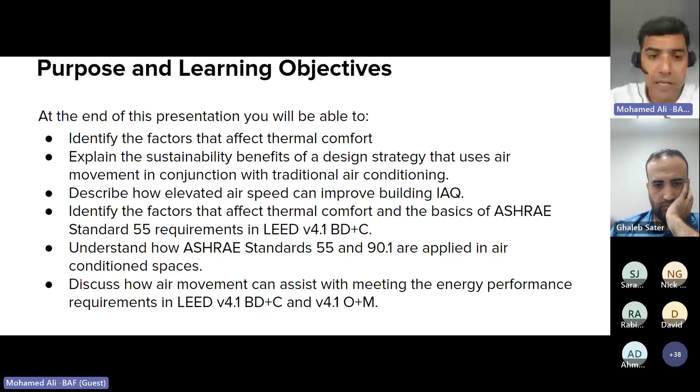First, we need to know what thermal comfort is. According to ASHRAE 55, we have a definition for thermal comfort: the condition of mind which expresses satisfaction with the thermal environment and is assessed by subjective evaluation. Simply, thermal comfort is totally a perspective for each one of us.

Typically, if we are a group of 10 people in one meeting room, and let's assume, for instance, we are between 22 to 25 degrees Celsius and RH about 50–55%, we would see the majority of us feel comfortable, but some of us will definitely not. Some of them would be complaining, oh, it's a little bit chilly. Some others would complain, oh, I feel a little bit hot.

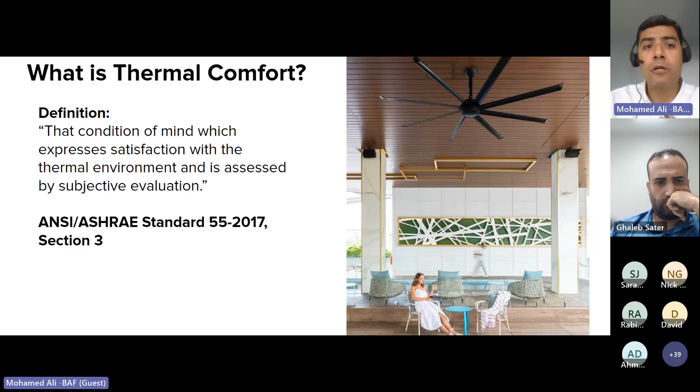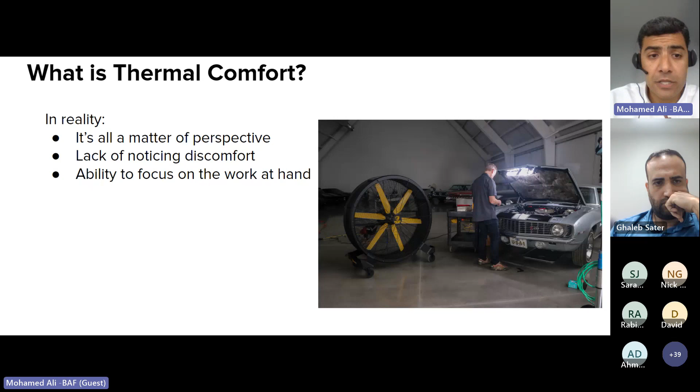So thermal comfort would be perspective from one person to another. That means probably the majority will be fine, but everyone has his own terms to identify thermal comfort. So in reality, thermal comfort is perspective, lack of noticing discomfort, and ability to focus on the work at hand.

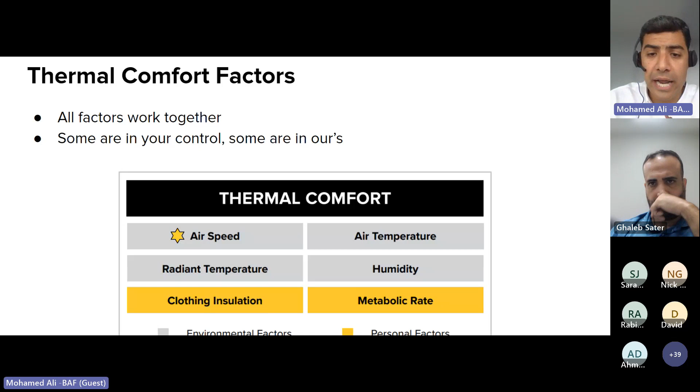Thermal comfort factors. There are some factors that affect our thermal comfort every day. There are actually 6 factors, 2 personal and 4 environmental. The 2 personal are clothing insulation and metabolic rate. We definitely control how many layers we're wearing a day, and we control the action, which is generating the metabolic rate. And the four environmental ones are airspeed, air temperature, radiant temperature, and relative humidity.

Clothing insulation. Each layer we add on our body has a clo factor. The more layers you add on your body, the more clo value. That means you feel much warmer. Technically, every one of us during the wintertime would be wearing multiple layers to keep warm.

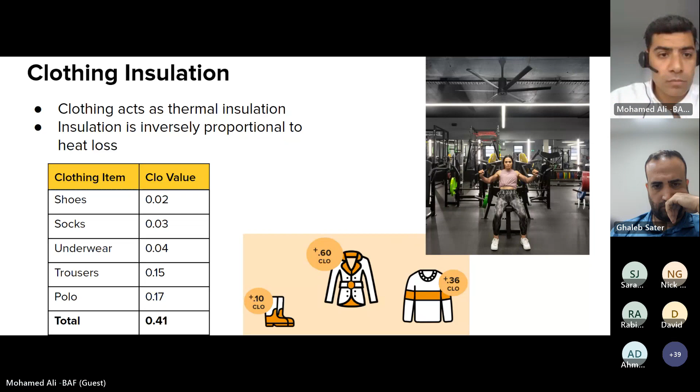Metabolic rate. In each picture that we see, we find someone who is standing, playing guitar, versus someone who's biking, versus another one jogging. Each one of us has a metabolic rate based on the action. So the more action you do, the more metabolic rate you get, and the warmer you feel.

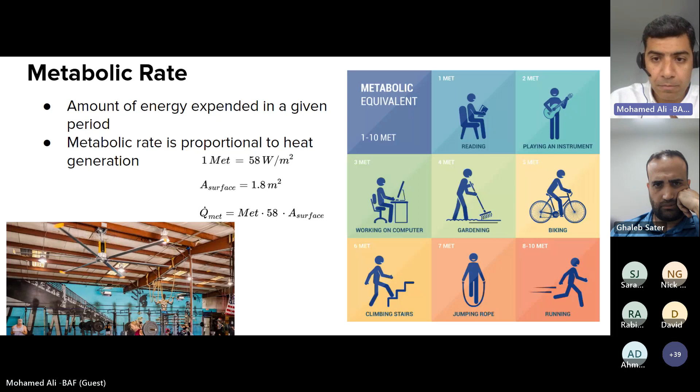Air velocity. Air velocity influences heat flow to and from the body. Typically, during the summertime when you come to the office or home, if there is no AC, the first thing you will do is turn on the fan at maximum speed. Why? Because you feel hot, probably sweating. So the air flowing to your body evaporates the moisture, and then you feel much cooler. So it impacts the rate of moisture evaporation from your skin.

And we have another example that we have day to day, while we're driving the car at a high speed, probably 110 kilometers per hour, during the summertime. The weather is probably 30 degrees.

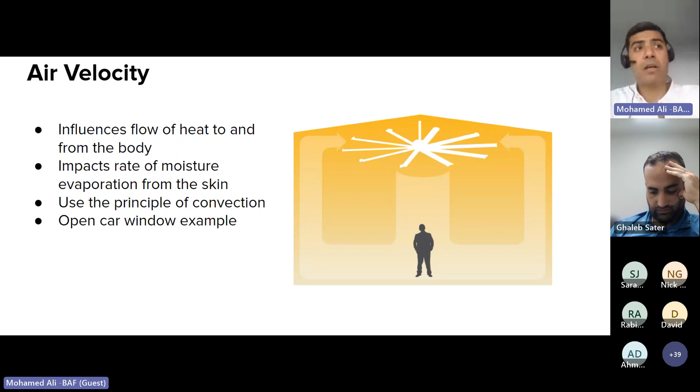You feel hot, and you just open the window, blowing all the air in, crossing your hand, your body, evaporating the moisture, and you feel much cooler. Technically, the temperature has not changed, but you get the perceived cooling from the air speed coming through the window across your body.

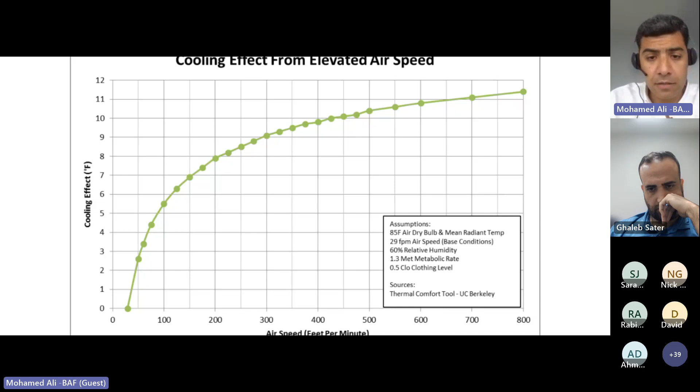And if we increase up to 700, you will see we can get up to 11. So if you increase over 800, you would be able to get more cooling effect. So the more airspeed, the more cooling effect you can get.

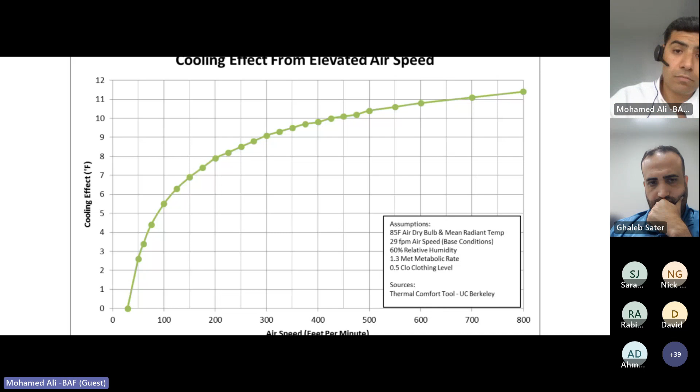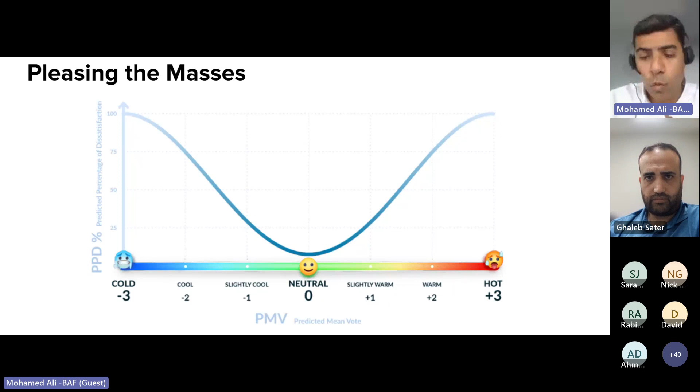Moving to the right side on the horizontal axis, you will be slightly warm, then warm, extremely hot. Moving to the left side on the horizontal axis, you will be slightly cool, and then cold. So we aim to be around neutral.

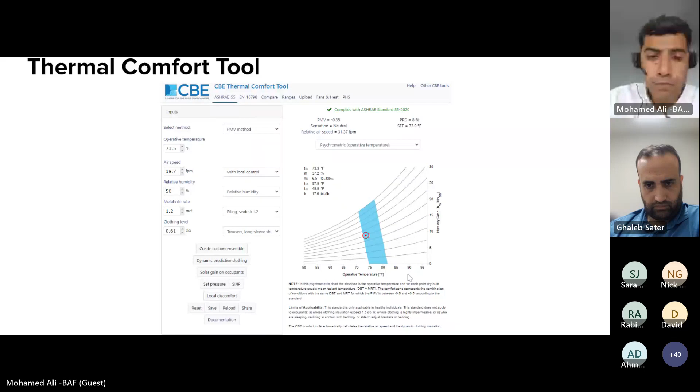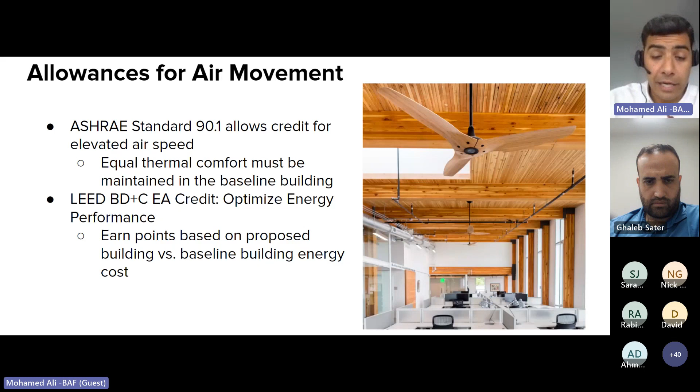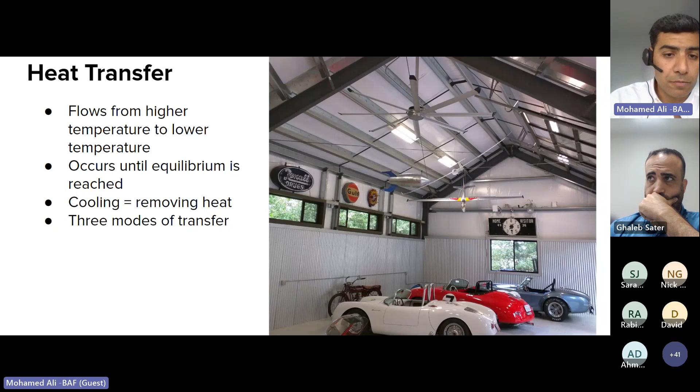So that occurs until equilibrium is reached, releasing the heat until the liquid temperature is equal to the surrounding temperature. And there are 3 different modes of heat transfer: convection, conduction, and radiation. I know probably 99% of the audience are aware of that, but it's a quick heads up on the basics. Radiation comes from the heat, conduction from the hand, and convection from the boiling water to the surroundings.

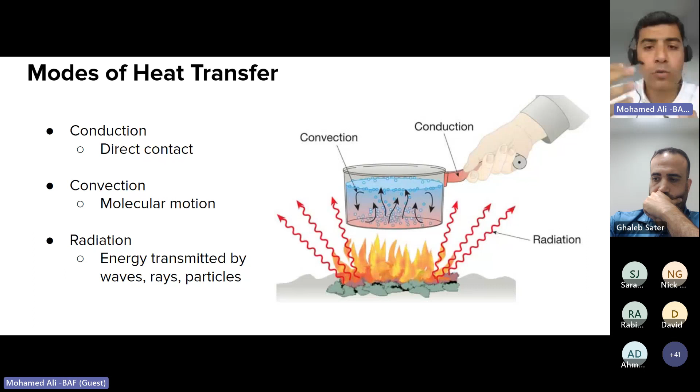We always say the human is a bad thermometer, because sometimes we really misjudge the situation or the surroundings. So, for example, if all of us are in one room, and the room is 22 to 25 degrees, RH about 50%, most of us will be comfortable. But let's assume there's one person coming out of a sauna.

It's about 70 to 80 degrees Celsius, and he's stepping into a room which is between 22 to 25. He will definitely feel a little bit cool, probably even cold. So even if it's comfortable for the majority of us, still someone is complaining and actually misjudging the situation or the temperature.

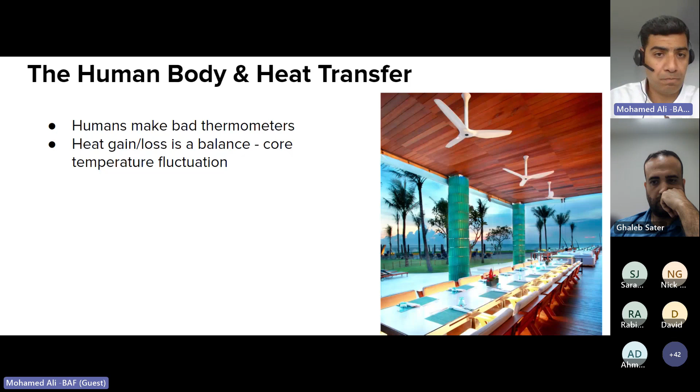There are 3 different modes of fan control that we typically use during the year. The first is increasing the airspeed to promote perceived cooling. Typically, this is in the summertime. Every one of us feels hot. You're running the fan at the maximum speed because you want to cool down.

In the wintertime, you receive a lot of complaints that the heat is not reaching down to the ground level. So we run the fan at low speed to promote destratification. And overall, we can run the fan at medium speed to have good mixing in the surrounding area.

Elevating the airspeed increases the convective cooling potential and evaporation rates. And we have Q convection equal to h, multiplied by the area, multiplied by the temperature difference.

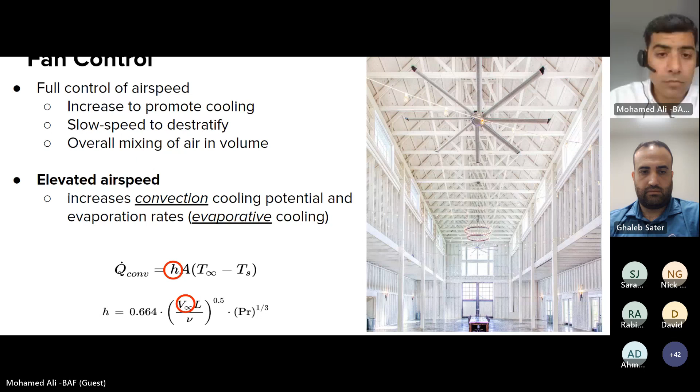Designing for cooling. The picture on the right-hand side of the slide shows one of the projects we have helped with, to promote cooling within a warehouse in certain areas like shipping and receiving and the workshop area where the employees are. Typically this is the area most warehouses are looking to cool: the workshop for the employees, and the shipping and receiving area for the people who work there.

So we have SpecLab, the app we usually use when we make our recommendation to do the design for a warehouse, hangar, office, whatever the application is, to provide the CFD, computational fluid dynamics, and it also gives the area metric, how much cooling effect you would be able to get by running the fan at 80% or 100% of the speed.

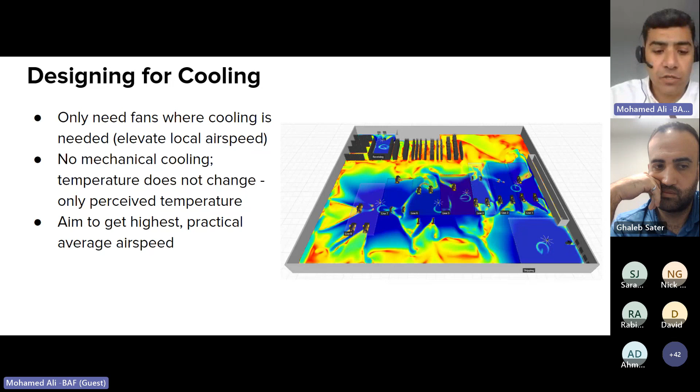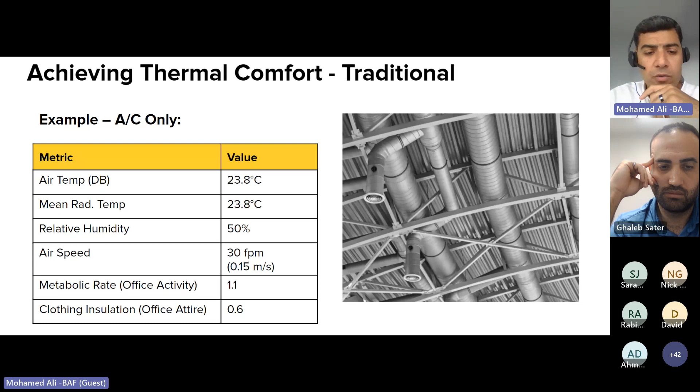Very interesting case. Now we will see thermal comfort with the traditional HVAC system, which all of us are aware of. So we've got a space with an air temperature design point of 23.8 degrees Celsius, RH 50%, air speed 0.15 meters per second. We are going to plug all the parameters we have here into the psychrometric chart, and we will see where we are.

Now I'm going to add the ceiling fan to the traditional HVAC system. I'm going to go to the thermostat and push it up from 23.8 to 26.1. And I'm going to run the fan to promote 0.6 meters per second, where in the previous case with the traditional HVAC system only it was 0.15 meters per second. So I'm changing the airspeed from 0.15, running the fan to promote 0.6 meters per second.

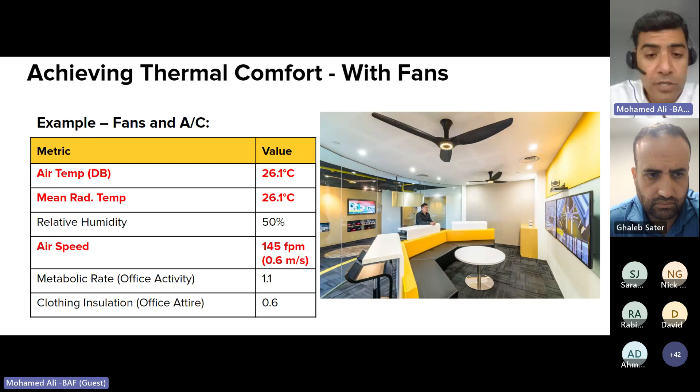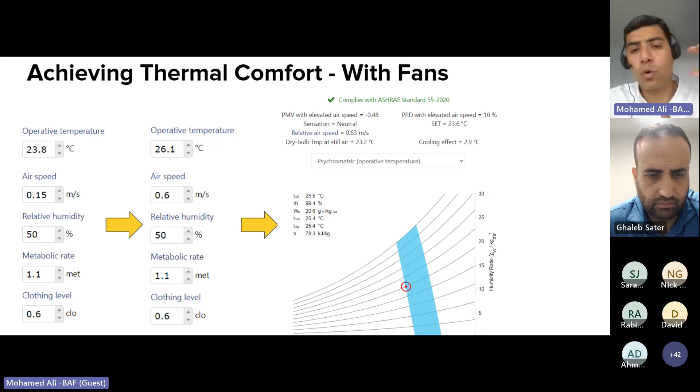And we're going to plug in the new data, 26.1 and 0.6 meters per second, and the remaining parameters will remain the same. So the point has not changed. That means I am in the thermal comfort area on the psychrometric chart. So I raised the thermostat and am still getting the same cooling effect and the same thermal comfort.

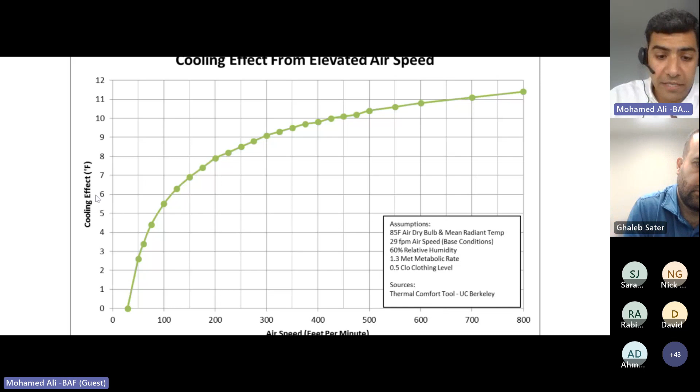Were they able to increase the cooling in the space using the ceiling fan? Yes. And that will take us quickly back to the chart here. By increasing the airspeed, you are able to get a cooling effect. So you will see the point here.

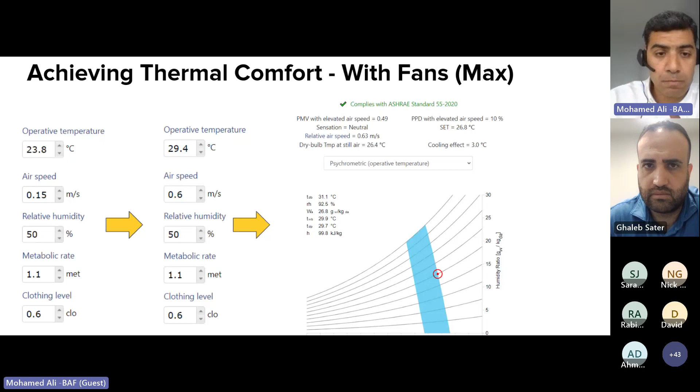This is one of the school gyms that we actually have done in Lexington, Kentucky. So we will see here, the location is about 7,833 square feet, and the set point is 22 degrees Celsius. We'll see the material and installation cost is $7.39 per square foot.

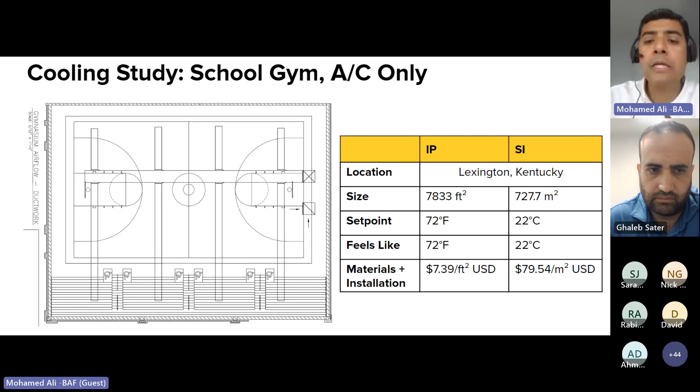If we apply the same concept to move up the thermostat from 22 to 25, that would be able to save the material and installation cost from $7.39 to $6.79. And this definitely has an impact on the duct material, insulation, and the labor.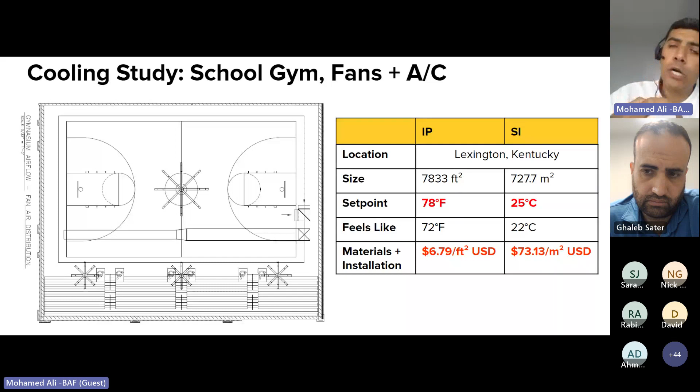And typically, if we see here, it's a main duct in the middle, multiple branches with the exhaust to cover the entire area. Here, it's only one main duct coupled with a ceiling fan able to distribute and get the perceived cooling effect or air mixing in the space. So the material and installation cost, including the fan, would be 60 cents per square foot.

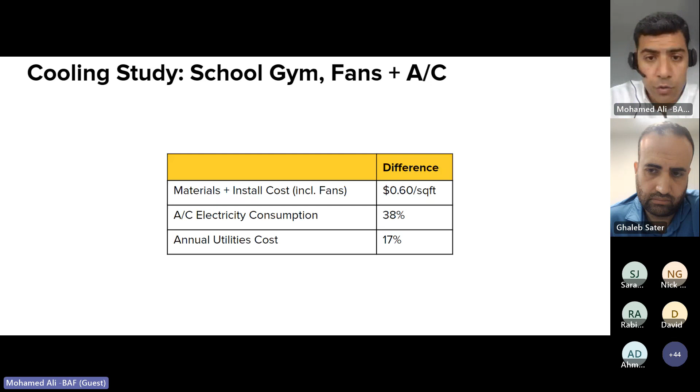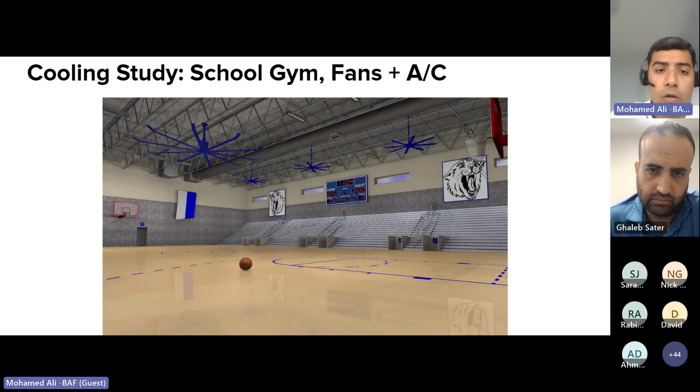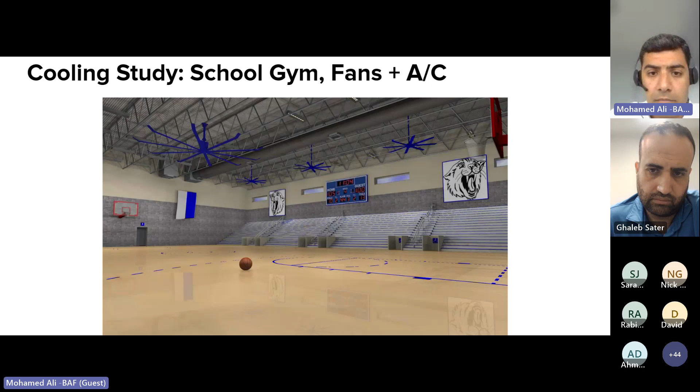We got a very common question. Would the fan be affected if the balls in the gym area hit the fan? The answer is no. Our fan has a number of safety redundancies and is very durable. It has a very durable design so that if the ball hits, there is no damage that would ever happen to the fan. And quickly, I'm gonna run the video for a couple seconds.

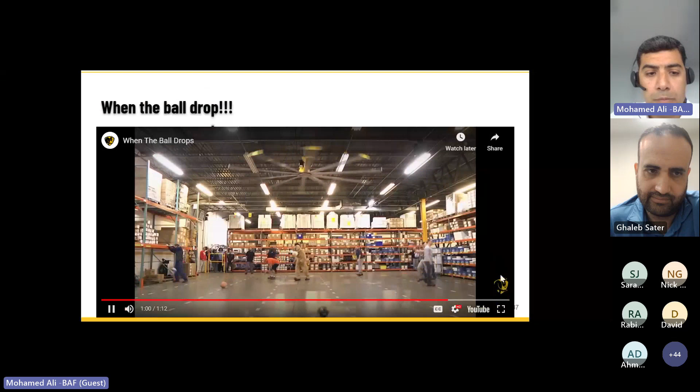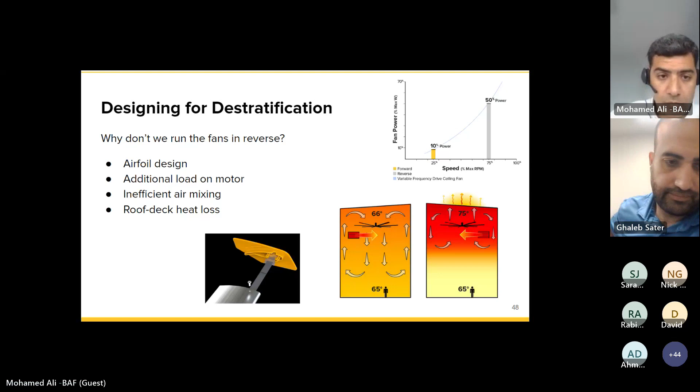Another example is for offices. The question is, if we have a warehouse or a gym area able to get a perceived cooling, do you think it would be applicable in an office? Yes, it'd be applicable, and we have done that. In a few slides we'll see one example in offices. We apply the same concept.

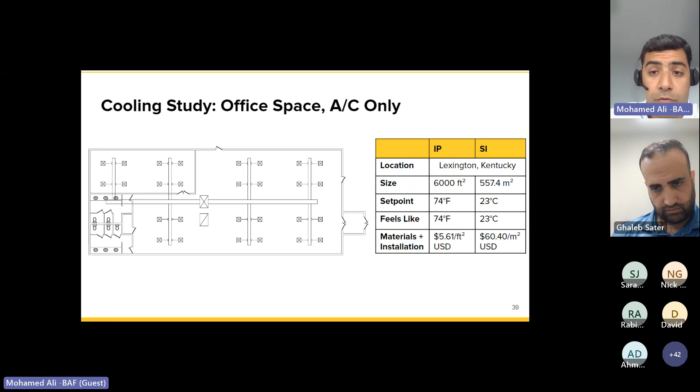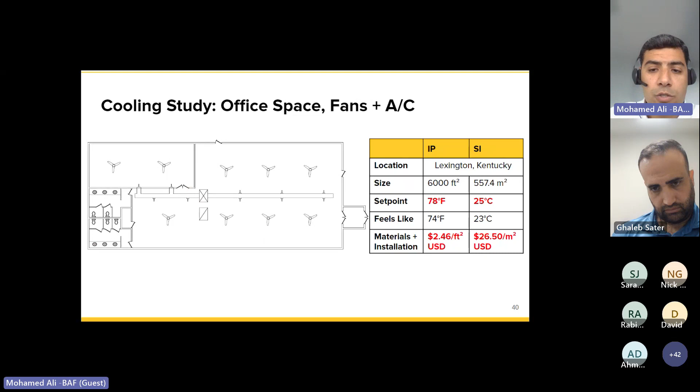And here is an example we're going to quickly go through. Our design point is 23 degrees Celsius, and we'll see the material and installation cost, including the duct, insulation, and the drop ceiling, will cost us $5.61 per square foot. Now, we're going to raise the thermostat from 23 to 25. You're going to get the same cooling effect, but your material and installation cost goes down from $5.61 to $2.46 per square foot. The fact is you saved the drop ceiling cost, you saved the duct, labor, and insulation.

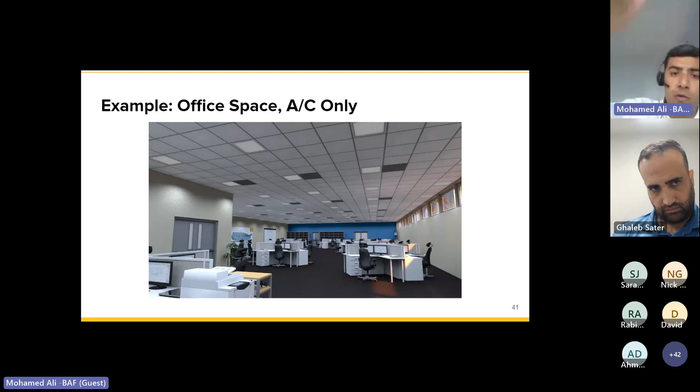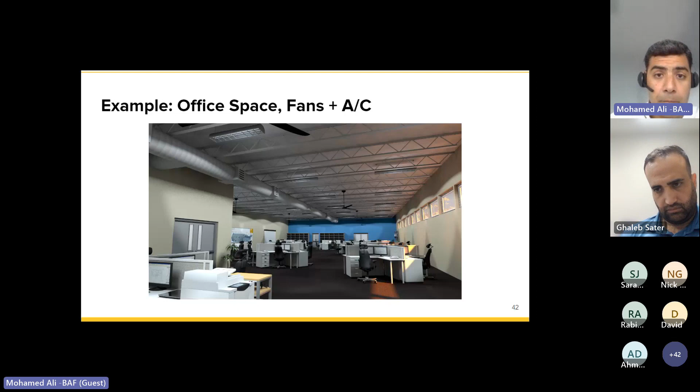So our summary here: offset the thermostat by the cooling effect generated by the fan. In all cases, we set the thermostat up 2 or 3 degrees and still get the same cooling effect. When we plug all the numbers into the psychrometric chart, it shows we are in the thermal comfort area according to ASHRAE 55.

Running the cooling equipment less, absolutely yes, and that reduces energy and saves money. Depending on how big the area, the warehouse or space is, if we save 2 or 3 degrees daily running the HVAC equipment during summertime, we can understand how much saving we would get by the end of the season.

It reduces the CAPEX of new builds through smaller cooling equipment. You can consider the ceiling fan's cooling effect during operation, and when you do, you're able to save on the capital cost of the cooling equipment when designing the HVAC system. It also reduces the OPEX, the operating cost over the year.

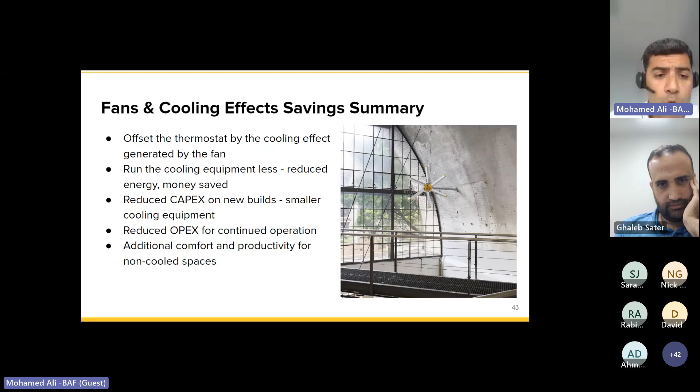So typically, by raising the thermostat, you achieve savings during the summer season, plus additional comfort and productivity for all non-cooled spaces.

Now we are going to talk about stratification and what we call destratification. This is basically the main complaint in most warehouses, hangars, and manufacturing facilities, especially with high ceilings above 15 feet - they always complain that up near the ceiling it's too hot.

If they have a mezzanine going up, they always complain it's too hot up near the ceiling, while at the ground level, where the employees and thermostat are, it's always cold, especially if gates are opening and closing during the wintertime.

So here's the second option: using the ceiling fan during wintertime. For stratification, we target ceiling heights above 15 feet, where it's definitely difficult to get uniform temperature.

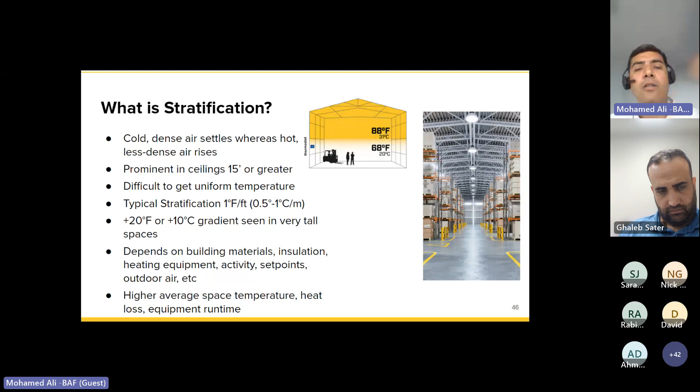Our point is we want to achieve destratification and better mixing by running the fan at low speed, letting the thermostat identify the right temperature at the ground level, so it can signal the heater to stop. Otherwise, the heater keeps running all the time because the thermostat at ground level reads only the cold temperature, not the right temperature.

So when designing for destratification, fans are needed throughout the area served by the heat to achieve maximum savings. As you can see in the picture on the right, the air is circulated in the space, and what we're looking for is to mix the air in the space - ideally, that's the goal.

There are guidelines and clearances that must be maintained to ensure circulation in the space: typically 2 feet away from the airfoils, the same distance as the fan diameter below the fan, and a clearance between the roof deck and the airfoils. We also need to maintain 3 feet vertically from the airfoils up to the sprinkler system, according to NFPA.

However, we need the fans positioned within the area that has the most heated air, then run the fan at low speed to push the warm air down and circulate it through the space. Fans can be spaced about 200 feet apart from each other.

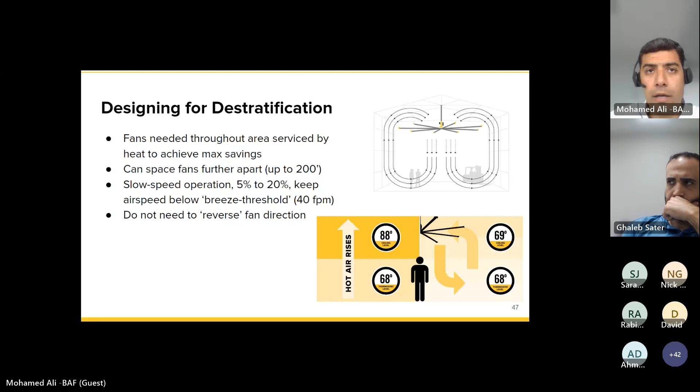We do not need to reverse the fan in wintertime for destratification. I guess it's a misconception for most of us that the fan needs to run in reverse during the winter.

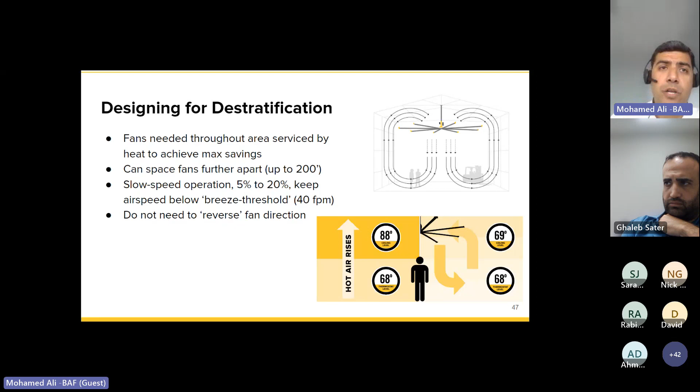We will see in the next slide, this is not recommended as a ceiling fan manufacturer, and that's due to a few reasons. The first is the airfoil design has an angle. As we see here, the fan has an airfoil shape. So if you're running the fan reversibly, that's going against the fan's airfoil design, so you wouldn't get the performance out of the fan, and there's additional load to the motor because you run the fan against the airfoil design.

Inefficient air mixing. Typically at ground level, the people are there while all the warm air is up. So if you're pushing all the air up, that means you don't mix the air in the entire space. You just mix the air up high near the ceiling, meaning less mixing down at the ground level, and the warm air will be up, and on top of that you're losing heat by pushing it all to the roof deck. While in the picture on the left side, the air is circulated, and you're able to get the benefit out of the ceiling fan by circulating the air in the space.

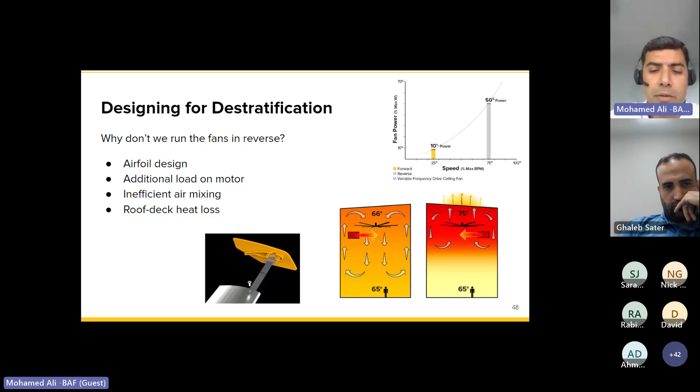One example that was done for Kentucky National Guard - they had a problem with stratification. They had a 36 foot ceiling height, and they were able to solve the problem by using a 24 foot diameter fan, the Powerfoil X4.

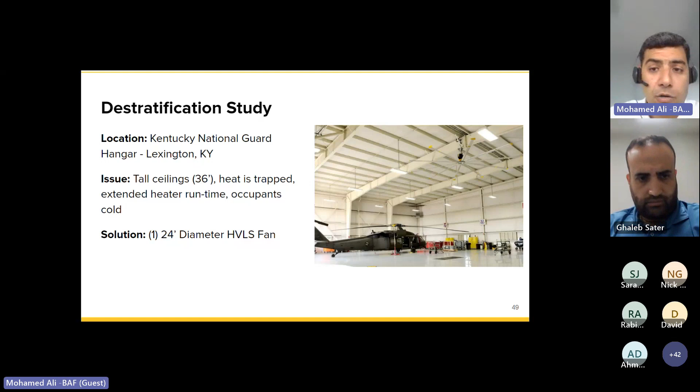If we run the fan, we see it start working and mixing the air in the space. We see the gap between the temperatures at different ceiling heights has shrunk, and we mostly saw a temperature difference of probably 1 degree or less between the 3 different height levels during the day.

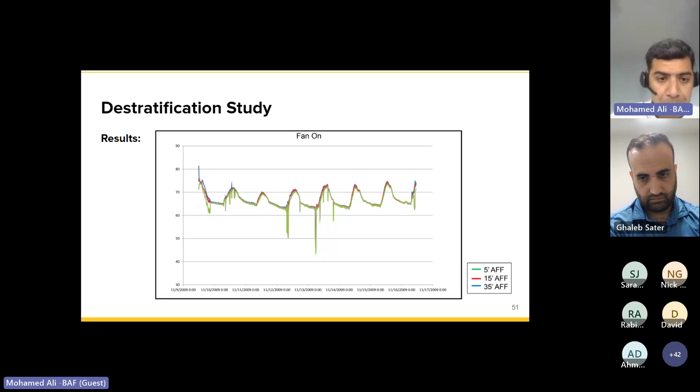This would also affect gas consumption. Mostly if the fan is off, we see the average temperature in the space would be 35.6 degrees Fahrenheit, while the average occupant level would be 56 degrees Fahrenheit, and the gas consumption would be 60,000 cubic feet.

While if the fan is on, that mixes the air in the space, the average temperature goes up from 35.6 to 35.8 - we see 0.2 degrees average temperature increase when we mix the air using the fan. The average occupant level goes to 56.7, with a 0.6 degree temperature difference, and the gas consumption goes down to almost 49,000 cubic feet. That shows us the difference is about 10,000, or 10,983 cubic feet.

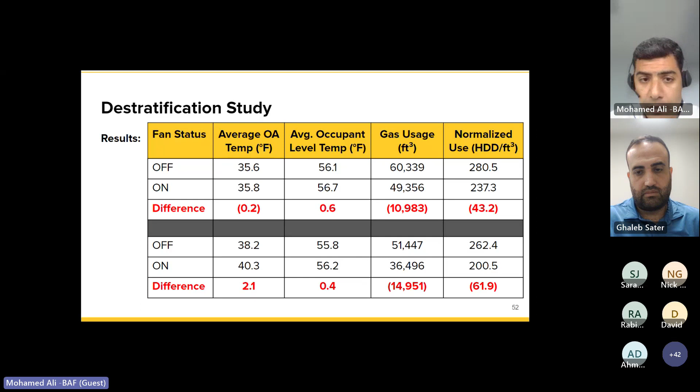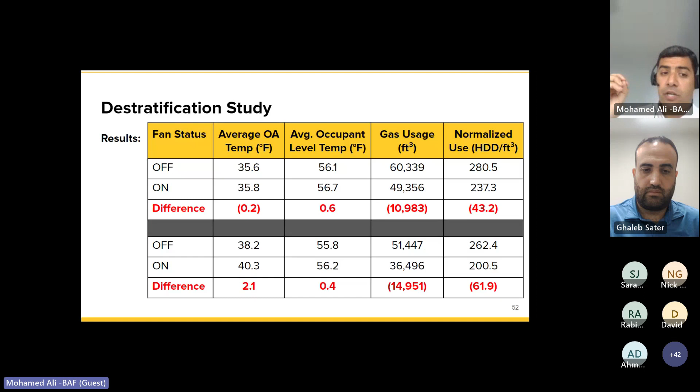If we have more than 0.2 - if we move the difference temperature up from 0.2 to 2.1 average temperature in the space, while at occupant level it's 0.4 - we see the gas consumption difference goes to 14,951. So that means the difference temperature at 0.2 has an impact of about 11,000 cubic feet of gas usage. In the case of a 2.1 degree Fahrenheit difference, we see about 15,000 cubic feet.

So the result of the study is the annualized gas saving would be 272,247 cubic feet. The cost saving would go to 2,714, while the fan operation cost will be $37. So simply if we do the math, we're able to get a net saving of about 2,677. And we've done the calculation for heat saving - how much heat and money you would be able to save by the end of the year by using the ceiling fan.

So this is something we would be able to provide if you are interested to see how much saving there would be if you would like to combine the ceiling fan for destratification with the heaters during the winter time.

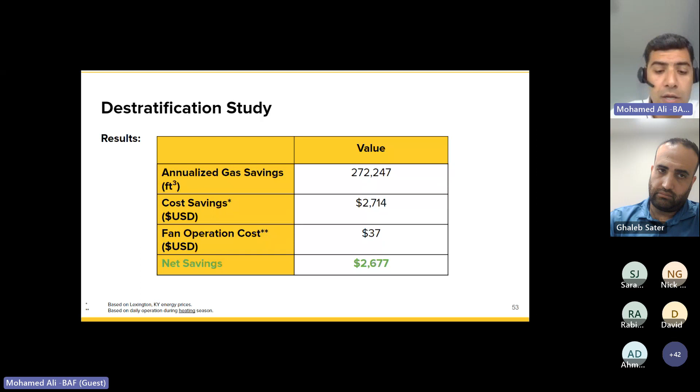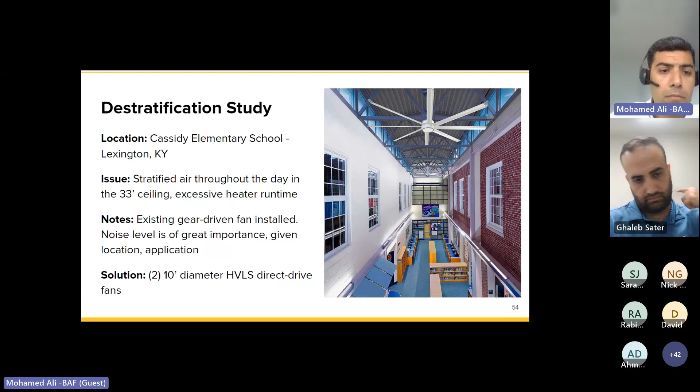We have the destratification study here for one of our projects at Cassidy Elementary School. They had an issue with stratification, with a ceiling height of 33 feet, and the heater running non-stop. So using the fan to achieve destratification, roughly about 2 10-foot diameter Essence fans were able to achieve the destratification.

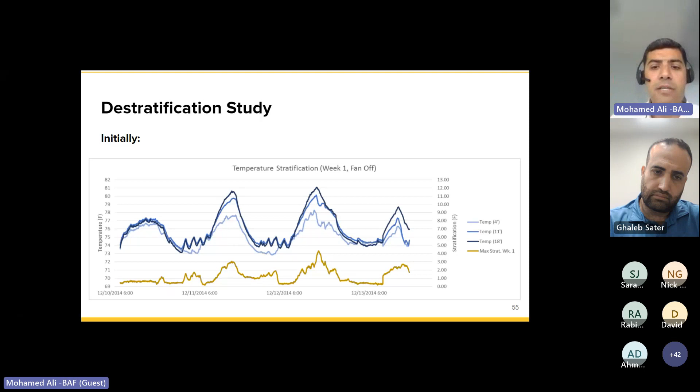Here is another chart showing destratification in the first week at the library. As we see, the temperature at different heights from 4 feet all the way up to 18 feet shows different readings at each height. But when the fan is on, the curve mostly looks flat.

So the result out of the case is overall 16.3% decrease in the HVAC during the wintertime, for the heating during running the ceiling fan. This stratification will be reduced from roughly about 4.3 degrees Fahrenheit to 1 degree at 18 ceiling level height, and the background noise level would be roughly about 1.7 dBA, which is roughly about 4.5%.

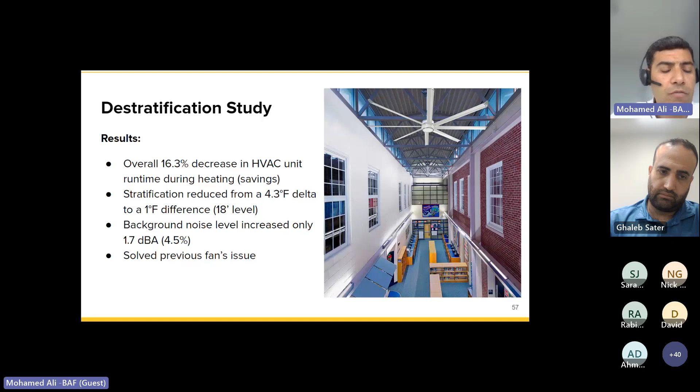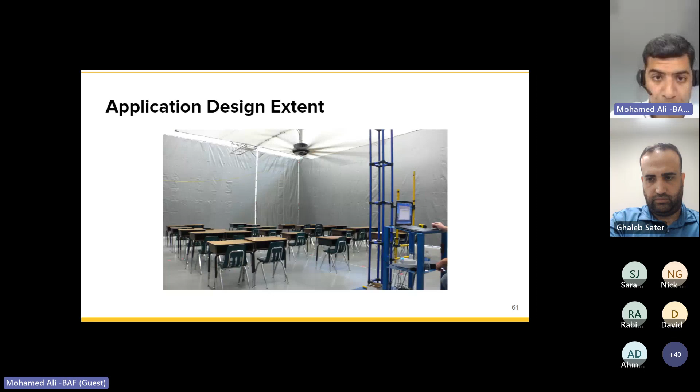This is one of the pictures for our R&D facility based in Lexington, Kentucky, where we have our headquarters and our R&D facility. So if we would like to have the fan in a classroom, we run the fan at multiple speeds, we will see at which speed the documents or paper will last on the desktop, and at which speed the paper will start flying away. So that means all our products would be tested in our R&D facility before we release it to our customer.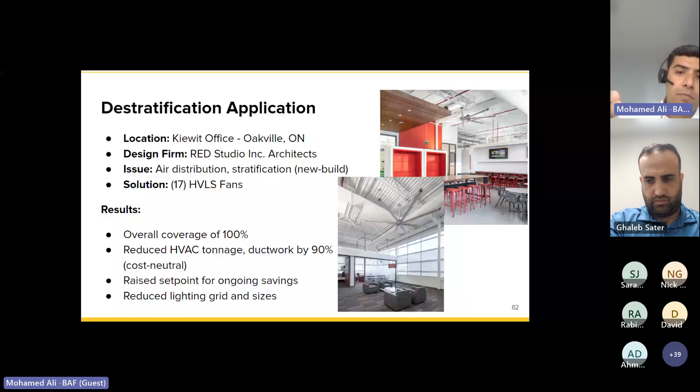That's one of the applications we have done in Kiewit office in Oakville, Ontario, Canada. They have a design firm, the design firm was Red Studio. The issue was air distribution, this stratification. We have solved the problem with 17 high volume low speed fans. It was warehouses and offices as well. So the result is coverage 100%, reduce the HVAC tonnage roughly about 90%, and raise the set point for savings as well, reduce the light grid and the size. So basically all our fans have an option to come with the LED light kit, starting from the residential fan, commercial fan, all the way to the industrial fan as well.

British Airways, one of the cases that they had an issue with destratification. They had an issue with an 11 degree Celsius temperature difference between the catwalk and the ground level workers. And what we see here, 5 24-foot ceiling fans for the hangar were able to save $114,000 by lowering the consumption by 2 million kilowatt hours.

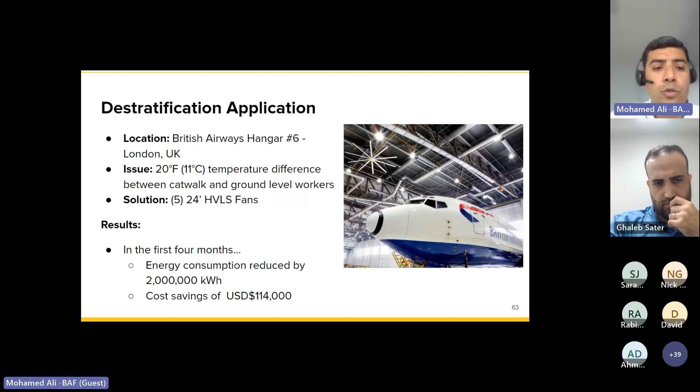If any one of us has been in the Dominican Republic, especially in Punta Cana International Airport, you will see our Powerfoil 8 fans have been installed. 38 of them were able to provide roughly about 6 degrees perceived cooling in the Caribbean heat, allowing the airport to retain charm and increase the overall airflow and comfort. As we all know, the airport actually has open areas, like the doors are always open, and the weather is really hot, especially during the summertime.

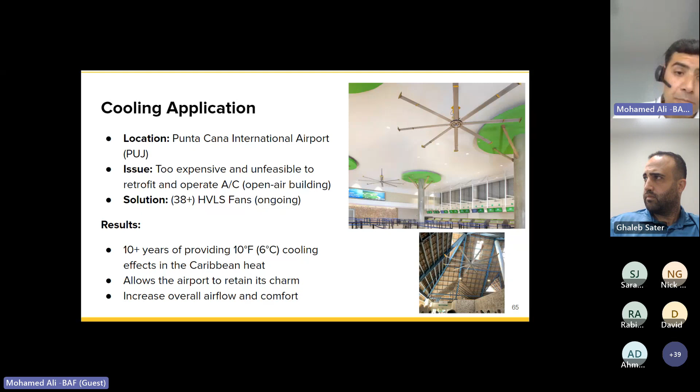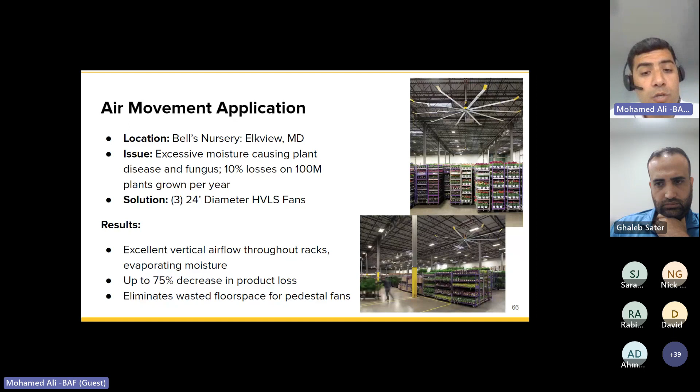One of the other applications is in Bell's Nursery. They have the issue of excessive moisture causing plant diseases and fungus, 10% losses on 100 million plants growing per year. We were able to solve the problem by using high volume low speed fans, 24 foot, about 3 of them, that were able to distribute the airflow throughout the racks and evaporate the moisture, resulting in a 75% decrease in product loss and eliminating the wasted floor space for pedestal fans.

The comfort, this is a quick chart showing us comfort versus productivity. Typically, we will see if we aren't really in thermal comfort, we won't be able to be productive. Typically, each one of us, if we come to the office in the morning, or an employee goes to the manufacturing facility, if it's too cold, if it's too hot, if the AC doesn't work during the summertime, or the heater isn't working during the wintertime, each one of us will start to complain and won't be able to be productive and do the work.

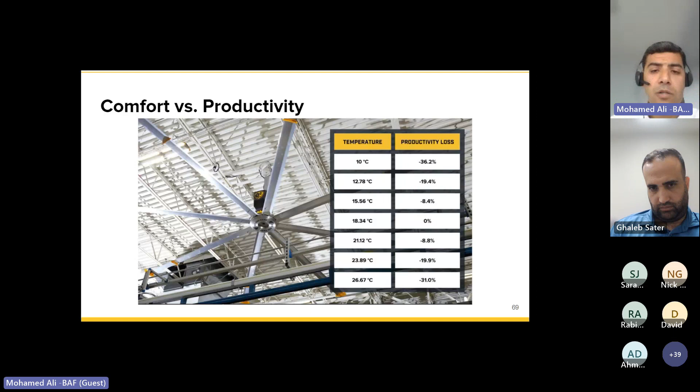So that chart shows us at multiple different temperatures how the productivity loss would be. That's one example that has been done in Kentucky for a manufacturing facility with 25 employees. Each one has an average hourly wage of about $15 for 40 hours. We'll see the money lost for less productivity about $15,000. Big Ass Fans would be able to save up to $9,000 per year, that's increased productivity up to 60%.

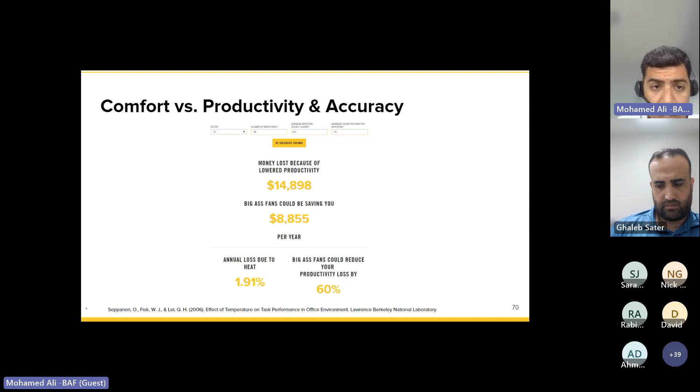There are last two examples to show us how to improve indoor air quality. One of them, when we have the fans in a swimming pool, we all know that all swimming pools have harsh chemicals, and most of this harsh chemical runs on the top of the surface, and each one of us in the swimming pool will inhale the air mixed with the harsh chemical.

So how would the ceiling fan improve the indoor air quality? So typically what we're trying to do is running the fan at a certain speed that increases the airflow over the surface, pushing all the air towards the exhaust and bringing more fresh air out of the duct. So typically what we try to do, we try to eliminate the amount of the harsh chemicals that are running on top of the surface.

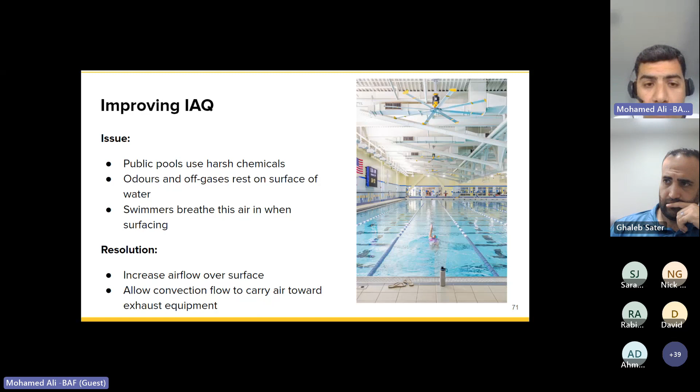Another example is the steel manufacturer facility, which is condensation mitigation. We all know the moist and cool surface creates condensation, and that actually leads to corrosion. And corrosion means typically material loss. So what we try to do is running the fan at a certain speed to increase the airflow and air speed over the surface, evaporate all the moisture, and then it eliminates the corrosion. So elevated air speed over the condensation promotes evaporation and increases the temperature near the floor.

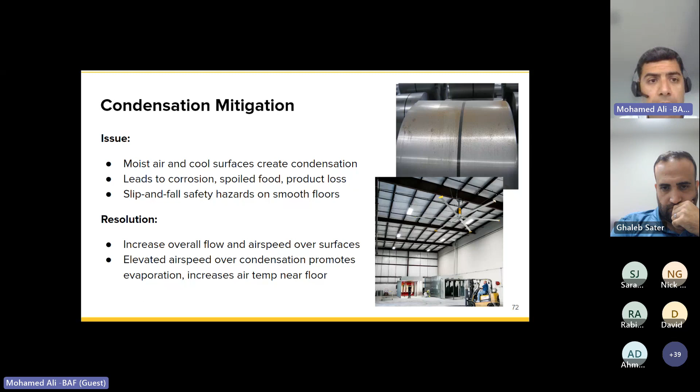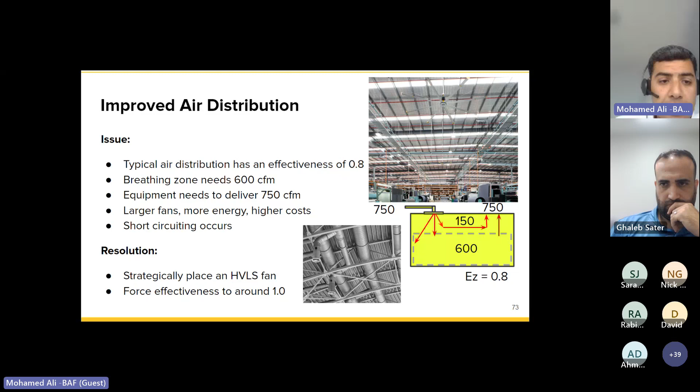The last slide is actually showing us the design: if you're looking for roughly about 600 CFM within a space, typically you would be looking for 750 CFM using the Ez factor 0.8. So typically by using the fan, you would use the Ez factor around 1, because the ceiling fan would be able to circulate the air in the space without adding additional air in the space. So strategically placed HVLS fans force the effectiveness to be around 1.

Conclusion: as we are trying to shift the concept of thermal comfort, we see in the US 6% of electricity generated is used for AC, which costs roughly about $29 billion for the AC only. And using the AC means carbon emissions. So that's about 117 million metric tons of carbon. And there's been a 63% rise in the cost of electricity since 2003.

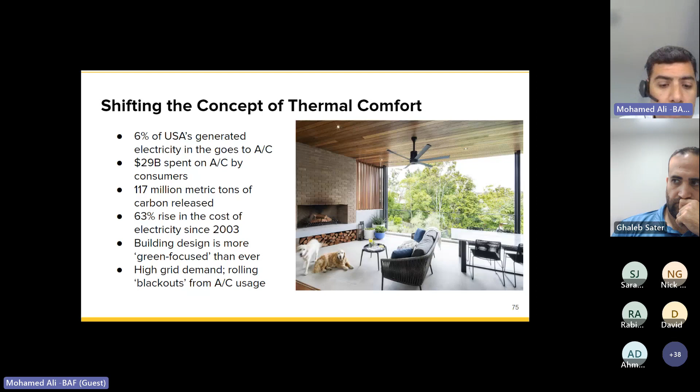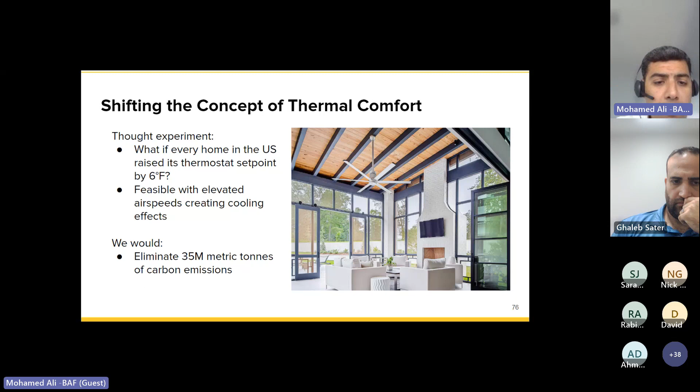What we're looking for now is building design that is more green focused, trying to eliminate the emissions and lower the cost, additionally for when we start the design for the material and the equipment, plus the running cost, by setting the thermostat up. Just a quick question: what if each home in the US raised the temperature roughly about 6 degrees Fahrenheit? We will see, with the elevated airspeed creating a cooling effect, that it would be able to eliminate up to 35 million metric tons of carbon emissions.